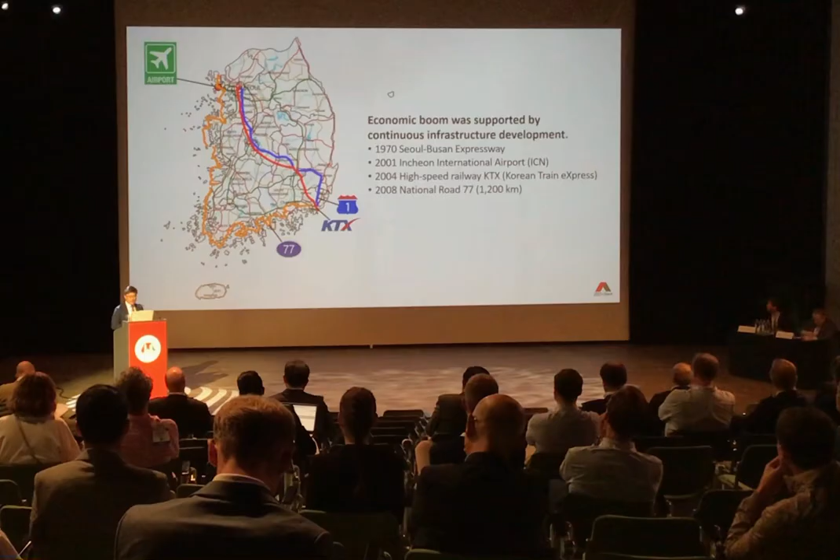The economic boom was supported by continuous infrastructure development: the Seoul-Busan Expressway in 1970, Incheon International Airport in 2001, Korea's high-speed railway in 2004, and National Road 77 stretching 1,200 kilometers along the west coast, to be completed in 2008.

Our research began in the mid-1980s with the development of analysis programs covering elastic catenary cable elements, initial configuration and equilibrium analysis, and construction stage analysis.

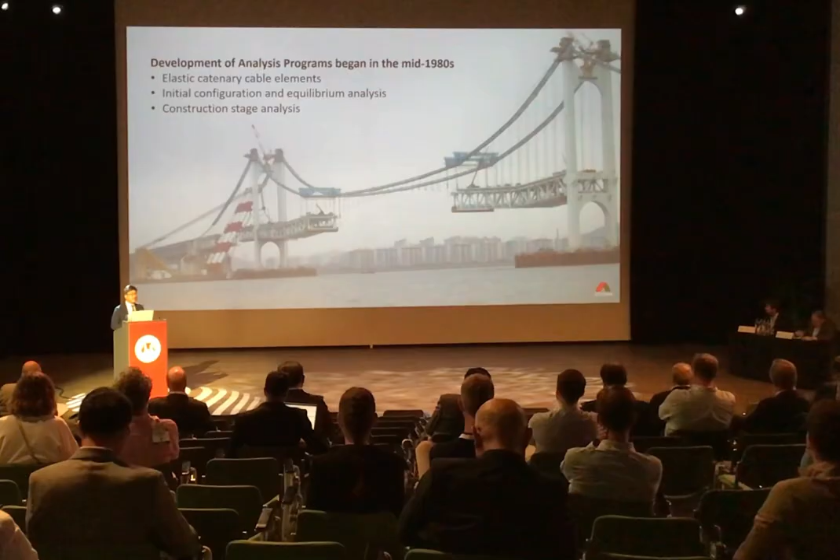These analysis programs were later applied to the Youngjong Bridge, a self-anchored suspension bridge with a three-dimensional main cable. Unlike earth-anchored types, the self-anchored system required a very different construction process, demanding more precise cable analysis.

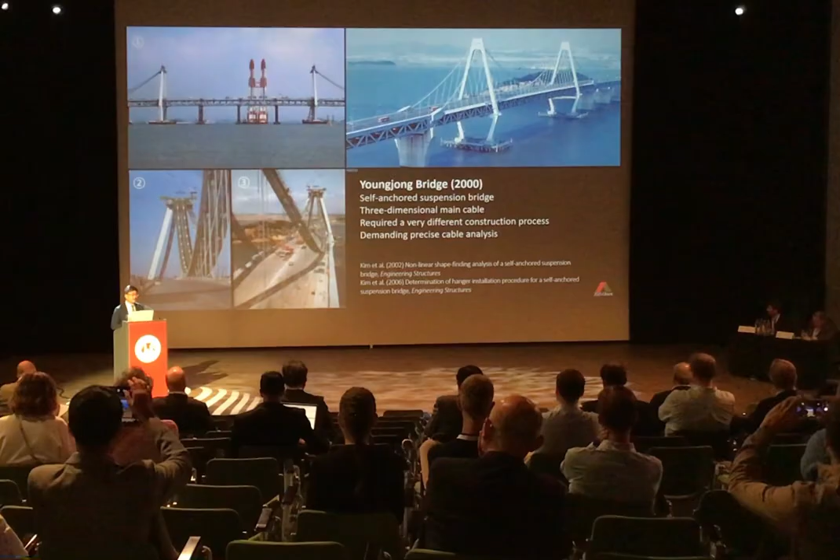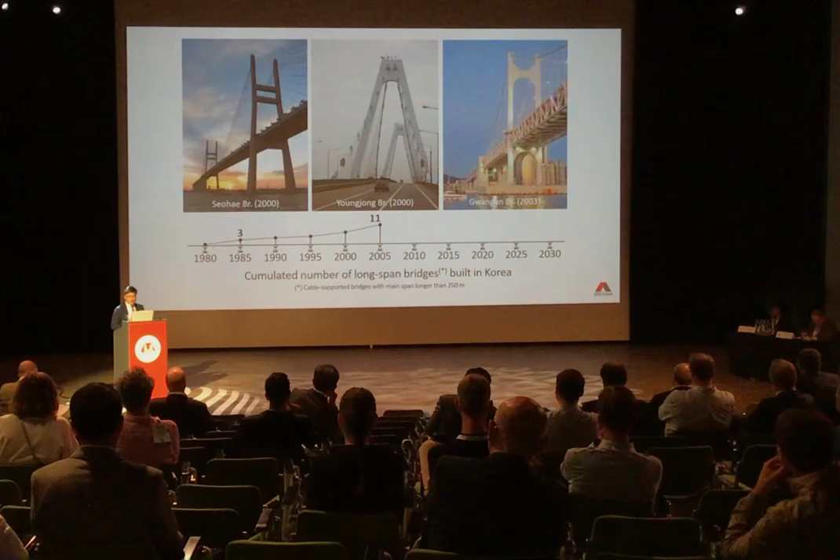We had merely 3 long-span bridges before 1985. The entrance into the 21st century was a turning point in Korean bridge technology. Seohae Bridge and Youngjong Bridge were completed in 2000, and Gwangan Bridge opened to traffic in 2003.

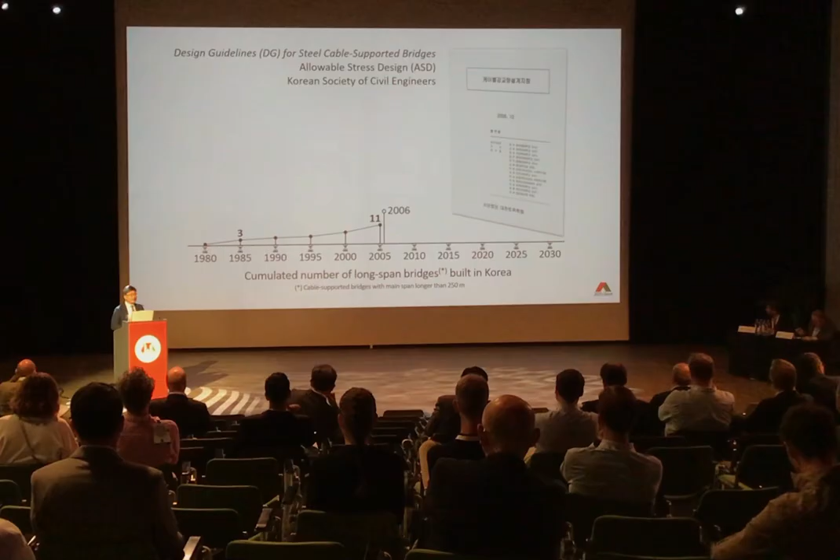In 2006, we developed the design guidelines for steel cable-supported bridges, relying on allowable stress design under the auspices of the Korean Society of Civil Engineers. In the same year, these design guidelines were adopted for the design of the Yi Sun-sin Bridge.

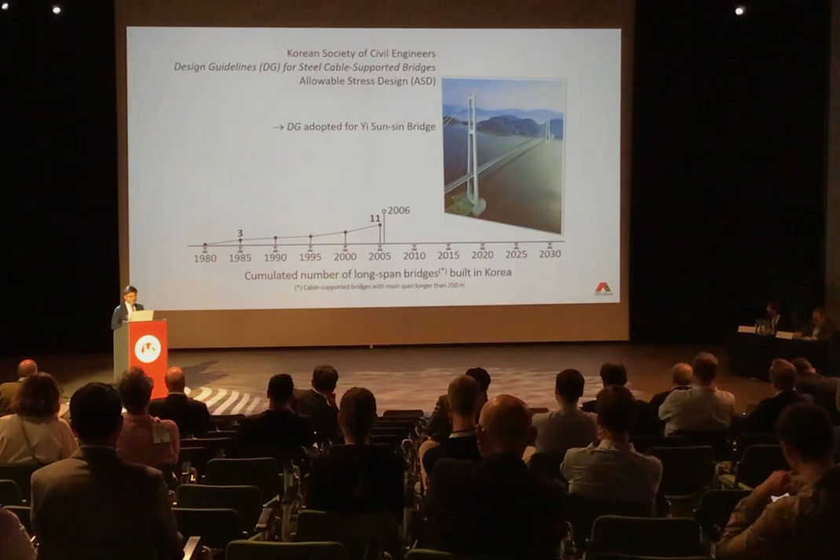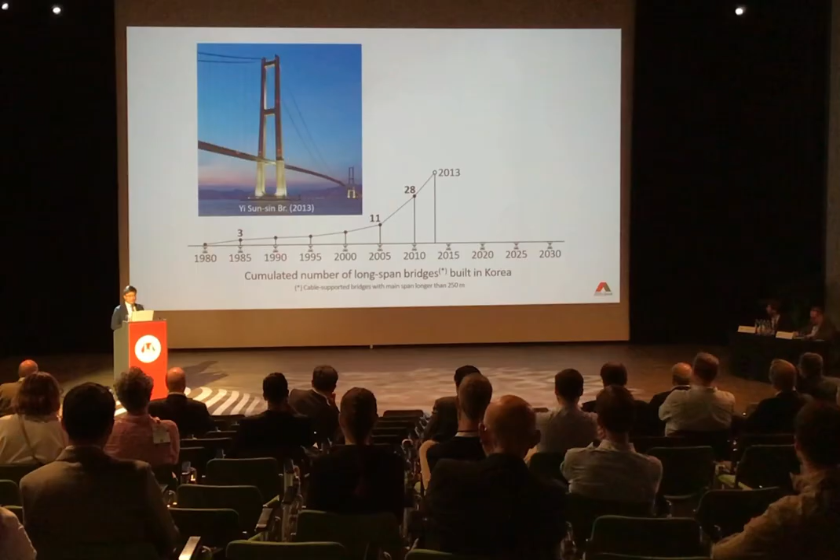The Yi Sun-sin Bridge was completed in 2013, and there was a sharp increase in the number of long-span bridges. The Yi Sun-sin Bridge is the longest, with a main span of over 1.5 kilometers. The gap between the twin decks was reduced to 4.3 meters through intensive wind tunnel testing.

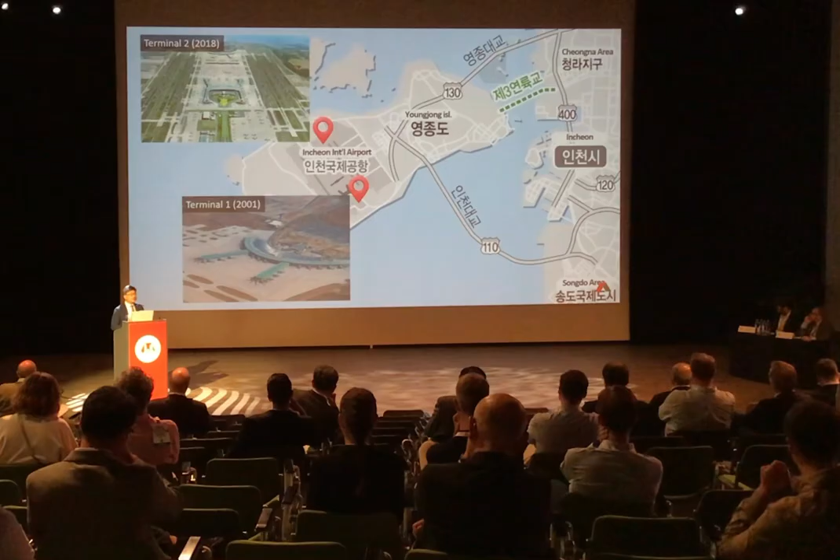At the dawn of the new millennium, Incheon International Airport opened with Terminal 1 in 2001 and expanded to Terminal 2 in 2018. Sea crossing bridges were built as the airport grew, and the third connecting bridge is currently under construction and will be completed next year.

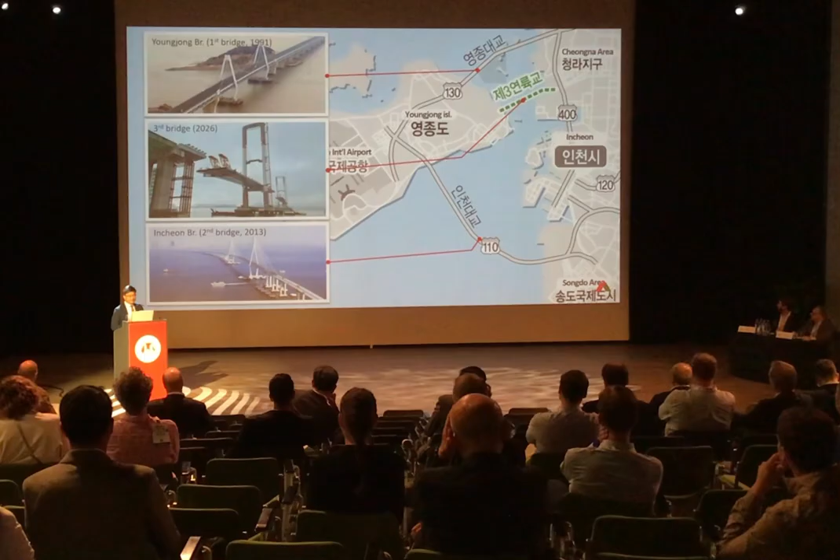The number of passengers has increased steadily, reaching 80 million today. This demonstrates the important role of infrastructure in promoting social development and enhancing international connectivity.

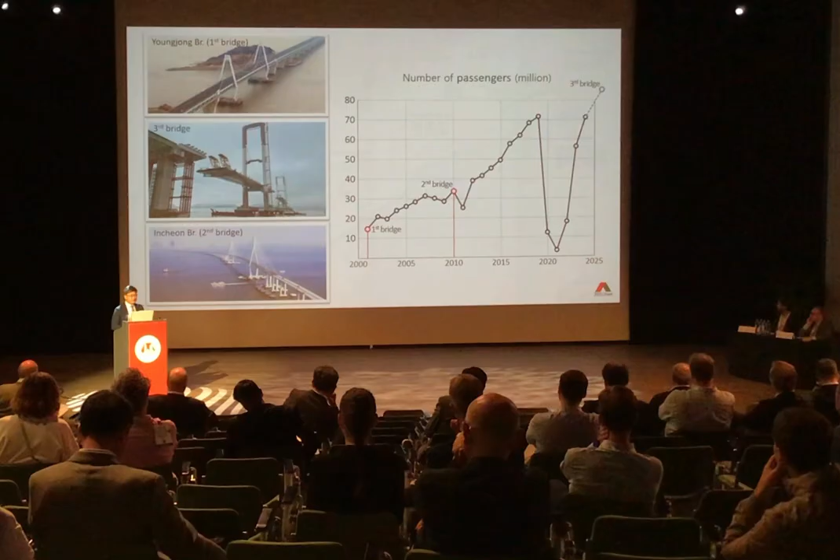During this period, we were planning the Value Creator 10 R&D project under the Ministry of Construction and Transportation, with the Super Long-Span Bridge project as one of its flagship initiatives.

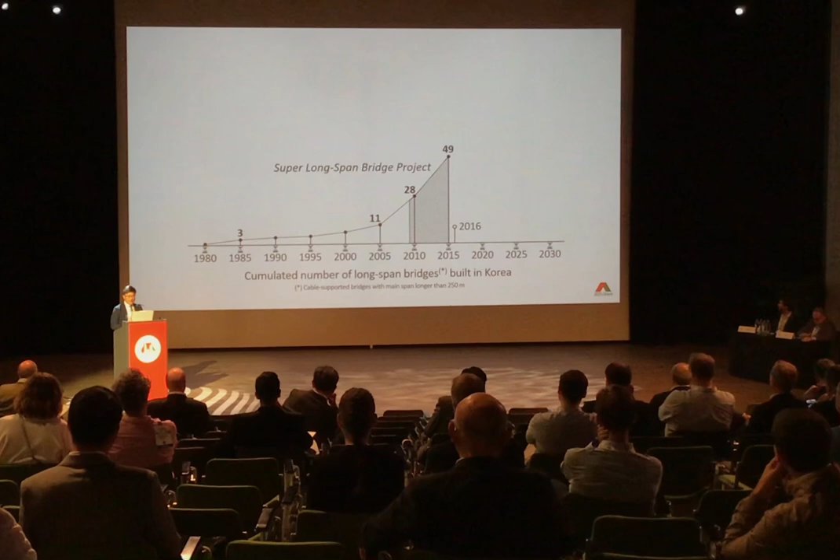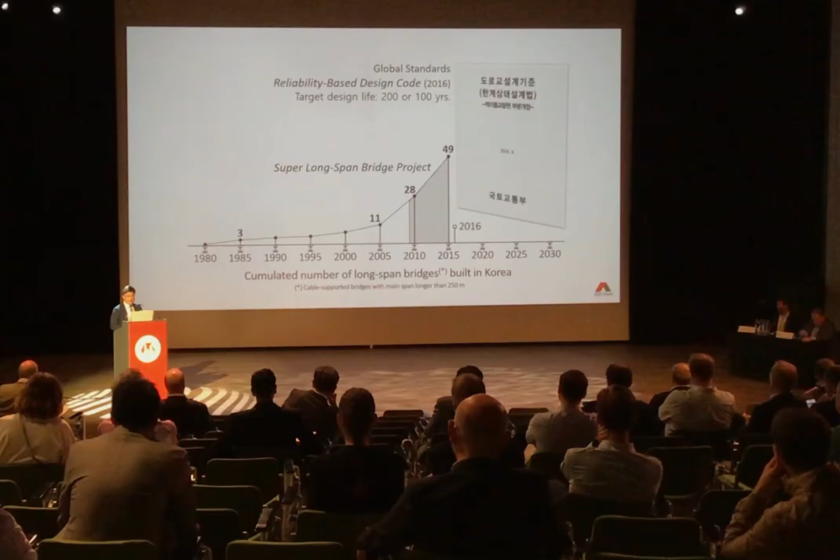As an outcome of the Super Long-Span Bridge project, we developed a reliability-based design code targeting a 200-year design life. The target reliability was set at 3.7 to 4 for traffic live loads, to unify load combinations and load factors across long and medium span bridges.

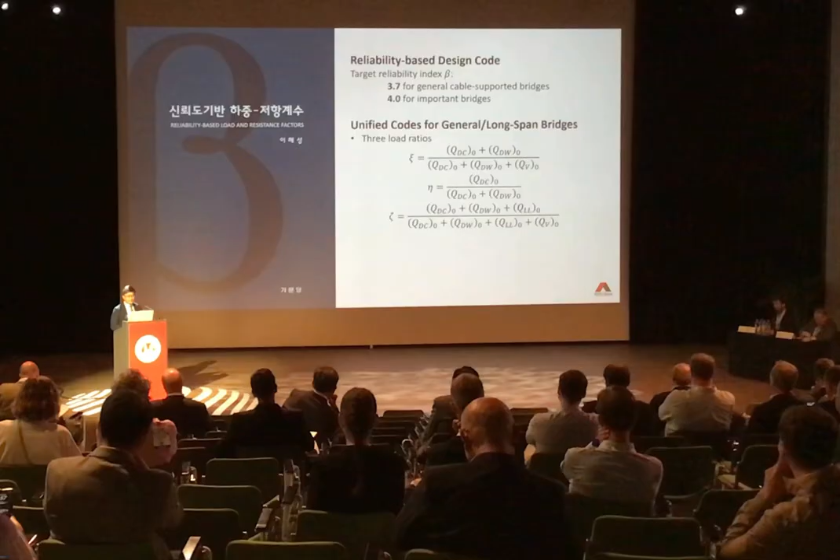We introduced 3 non-dimensional load ratios. We adopt lower beta values for lateral loads such as wind and earthquake, to account for higher variability when dead load contribution is minimum. For code calibration, we introduced the concept of RRD, the ratio of return period to design life. RRD was set to 12 for wind, giving a target reliability index of 2.0, and 24 for earthquake, resulting in a target index of 1.5.

Jeollanam-do is the southernmost province in mainland Korea and comprises 1,891 islands, of which 400 are inhabited. Jeollanam-do has developed a diamond-shaped network linking its major islands, with the longest connection being the 8-kilometer Cheonsa Bridge.

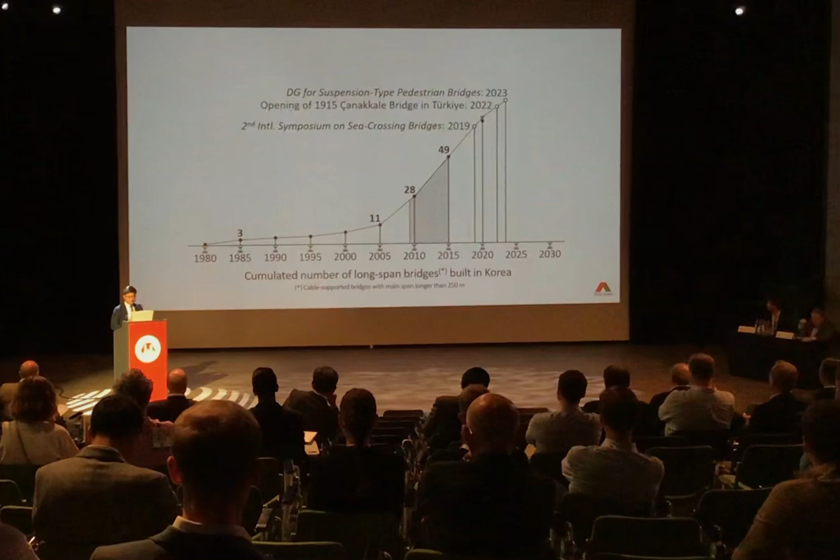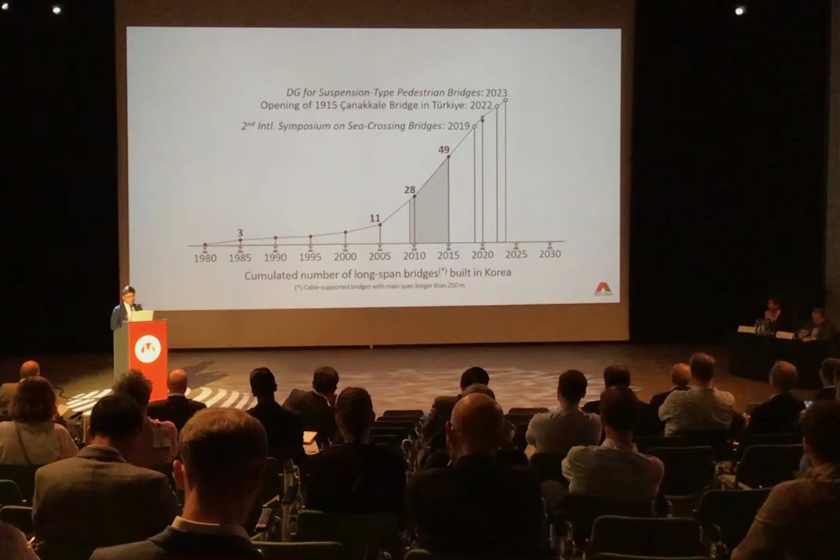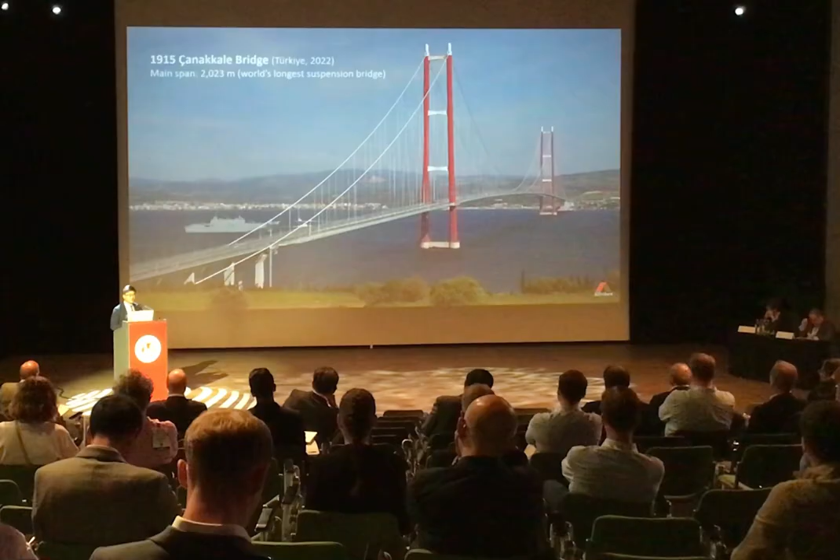The world's longest Çanakkale Bridge opened to traffic in 2022. Two Korean companies, DL E&C and SK, built the bridge with two Turkish partners and are now operating it.

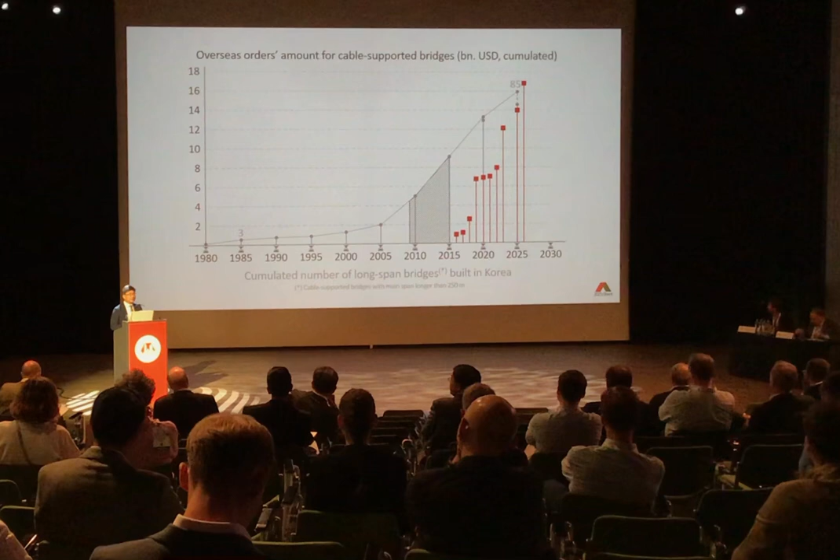High-strength wires for suspension bridge main cables were developed by POSCO and Kiswire. In the 1990s, 1.5 to 1.7 gigapascal was used. From the Yi Sun-sin Bridge, we applied 1.86 gigapascal, then 1.96 gigapascal for the Ulsan Harbor Bridge. These wires were also supplied to the Çanakkale Bridge. And we are now applying 2.16 gigapascal for an ongoing project.

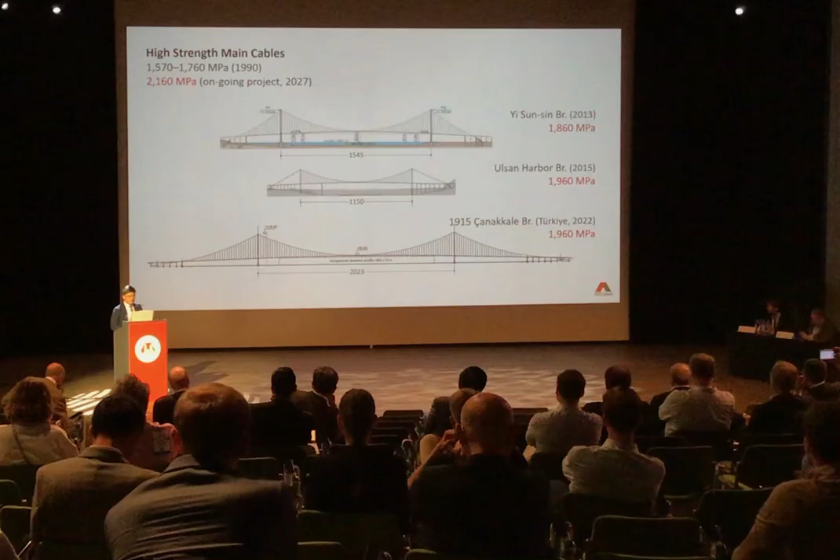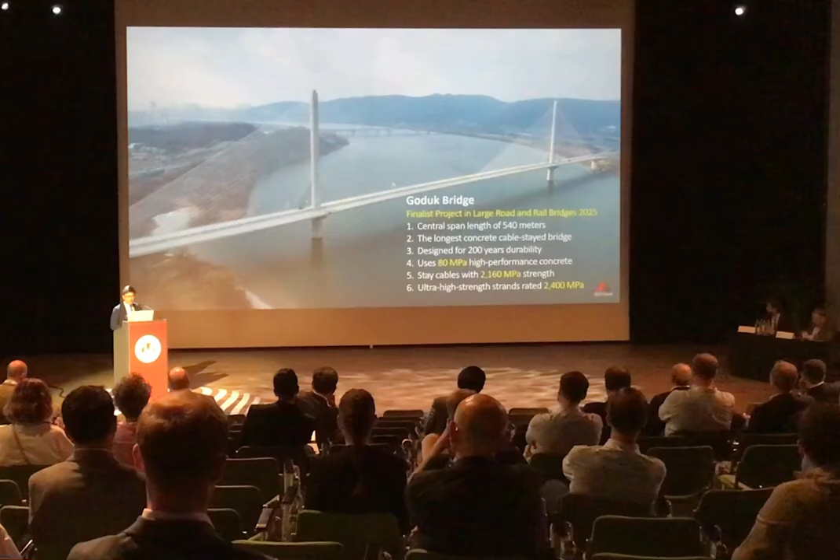Very recently, a concrete cable-stayed bridge with a 540-meter main span was opened over the Han River in Seoul, using 80 megapascal high-performance concrete. It was honored as a finalist for this year's IFC Award in the large road and rail bridges category.

UHPC was also developed by the Korea Institute of Construction Technology under the Super Bridge 200 project, targeting a compressive strength of 180 megapascal, and it was later applied to the Chuncheon Bridge.

Let me now share some case studies on long-span bridges I have worked on, focusing on aerodynamic issues in wind engineering.

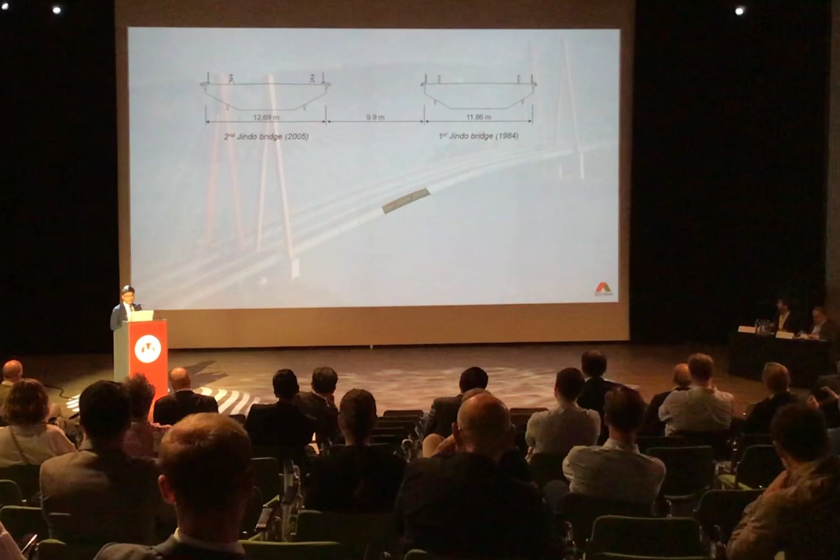This is the Jindo Bridge. The first bridge, one of the first generation bridges, was built in 1984. Twenty years later, a second bridge was constructed as a twin bridge to accommodate increased traffic volume. The gap between the two decks is around 10 meters, and both use guide vanes to mitigate vortex-induced vibration, which works well for the first bridge.

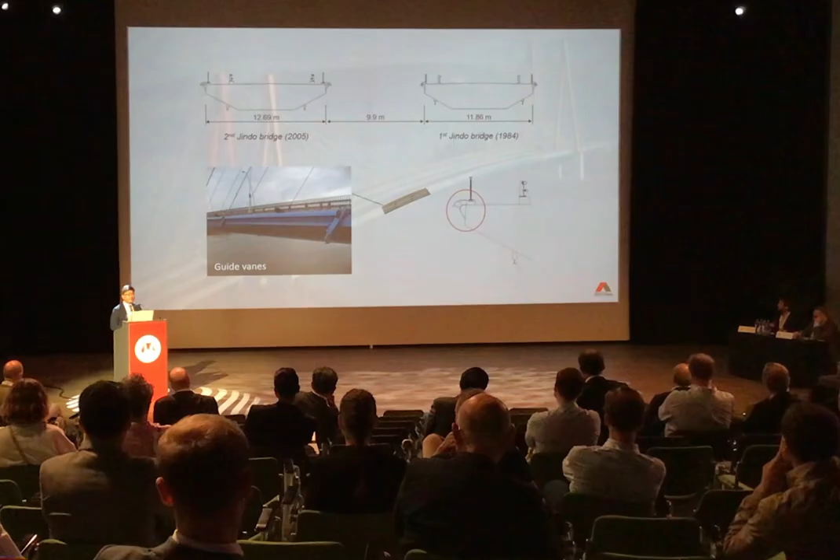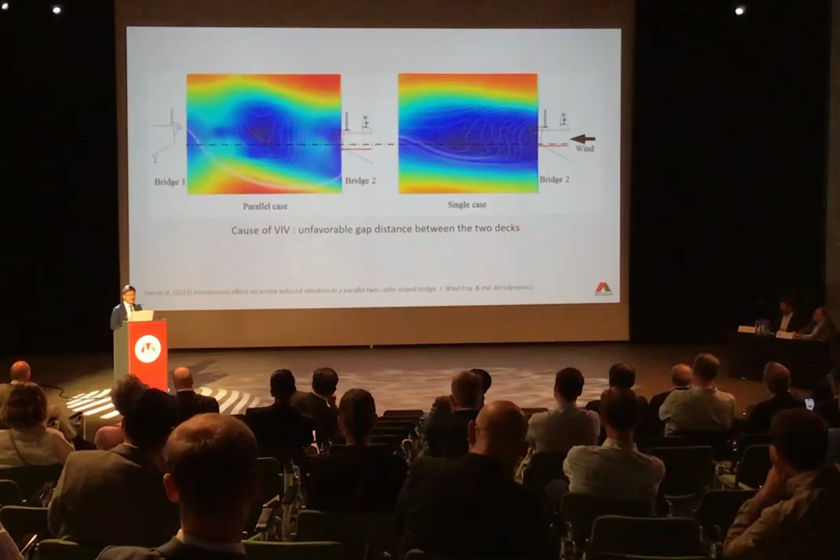To clarify the interaction between the two decks, a PIV test was performed. The right image shows wind flow for the single deck case, with dark blue indicating near zero wind speed. The left image shows flow between two decks, where sky blue streams highlight amplified vortex trails behind the upstream deck, inducing its vortex-induced vibration. Changing the distance between the decks weakens this vibration, showing that the 10-meter spacing happened to be the most unfavorable choice.

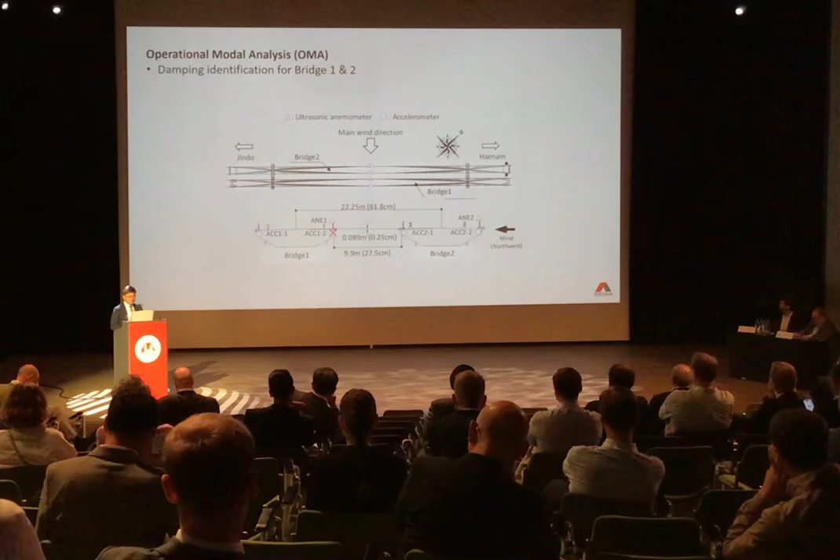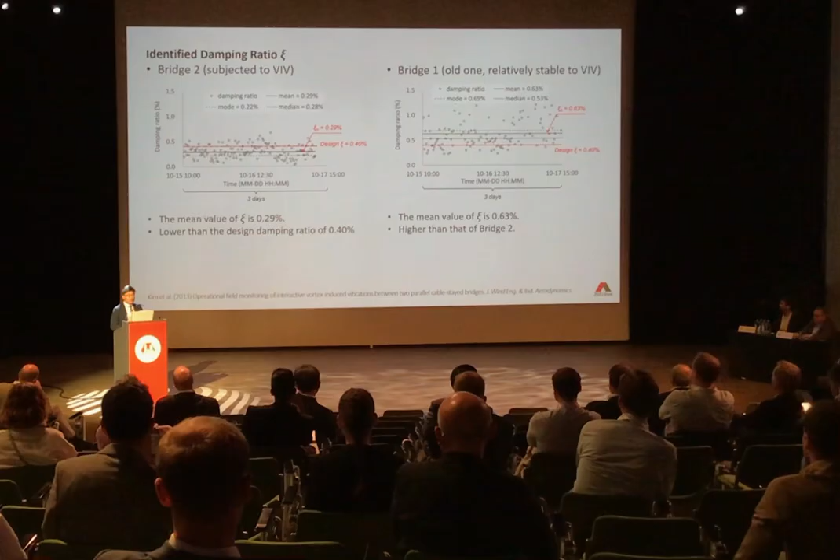We also performed operational modal analysis to determine the damping ratios of both bridges using data from built-in sensors. On the left, each circle represents the estimated damping ratio for 20 minutes of data. The average damping ratio of the new bridge was 0.29%, much lower than the design value of 0.4%. In contrast, the old bridge shows a damping ratio of 0.63%, higher than that of the new bridge.

In conclusion, the cause of vortex-induced vibration can be summarized as, first, unfavorable deck spacing, and second, unexpectedly low structural damping of the new bridge. This is a particular concern for recent bridges that use high-strength steel and simplify welded details.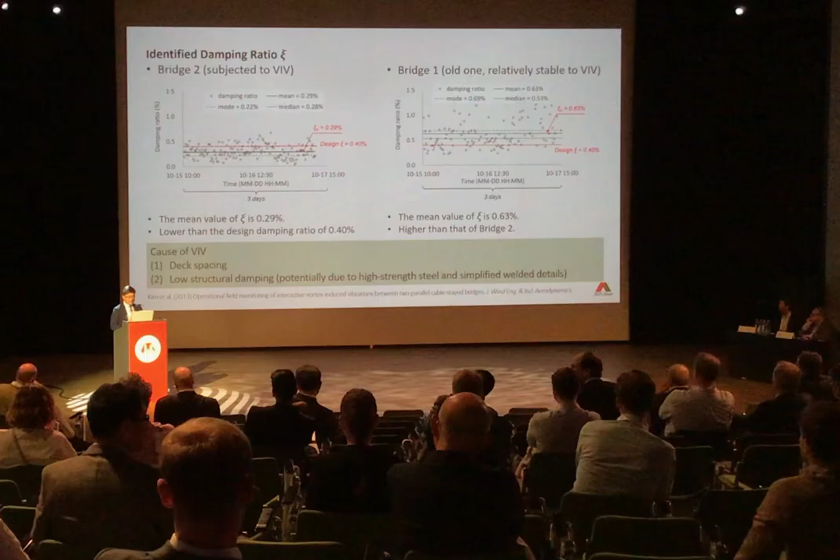Next is Cheonsa Bridge. Personally, it is my favorite as its bundled stay cables create a harmonious aesthetic. The bridge has high and low pylons with concrete decks on the approaching span and a steel deck in the central main span.

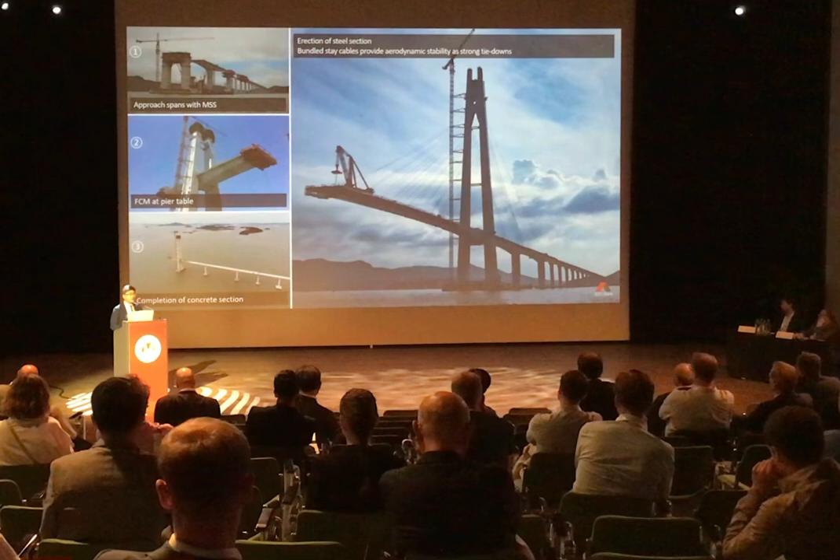A moving scaffolding system was used for the approach spans, as shown in Figure 1, and the free cantilever method was applied at the pier table of pylons, as shown in the second figure. The third figure shows the completed concrete deck spans. Afterwards, the steel deck of the main span was constructed with strong tie-downs provided by the bundled cables for aerodynamic stability during construction.

Although the bridge was well designed, vortex-induced vibration was reported soon after its opening.

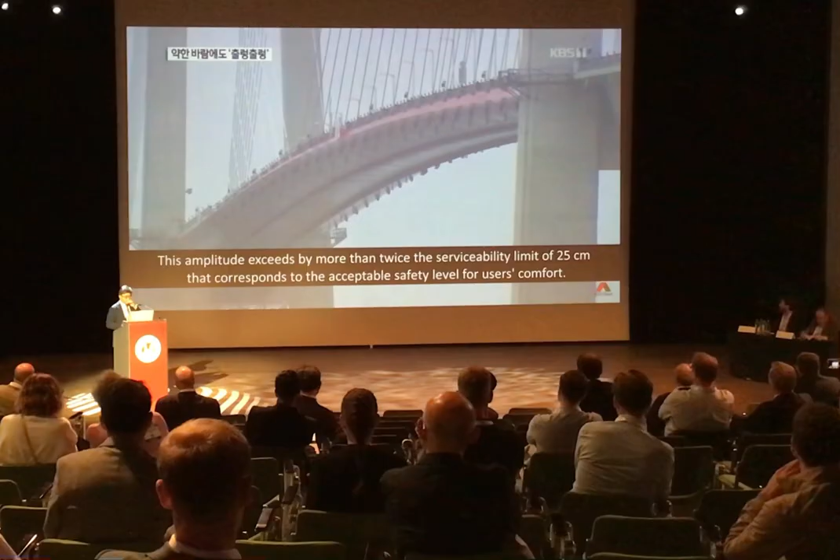So it is a news broadcast at the time, and this vortex-induced vibration was caused by the incorrect positioning of maintenance rails beneath the deck.

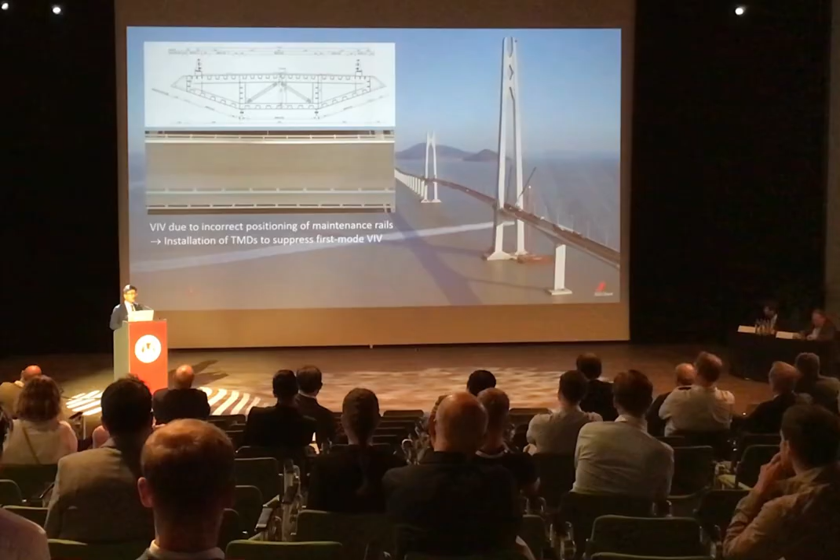The bridge owner installed tuned mass dampers to suppress this vibration. The deck's vortex-induced vibration was effectively suppressed by the tuned mass dampers, but additional issues arose with stay cable vibration.

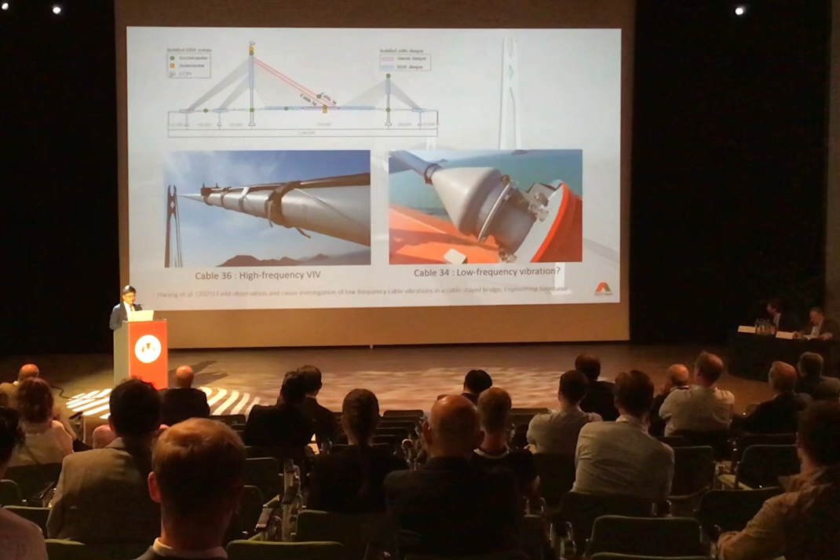So this is low-frequency vibration for specifically cable 34. We investigated the cause of this low-frequency vibration using CCTV images provided by the bridge owner, recorded during the vibration of cable 34.

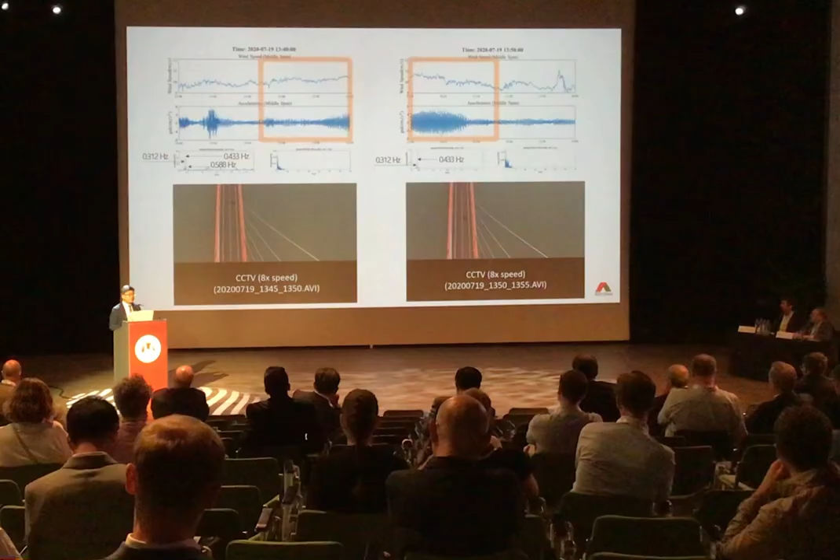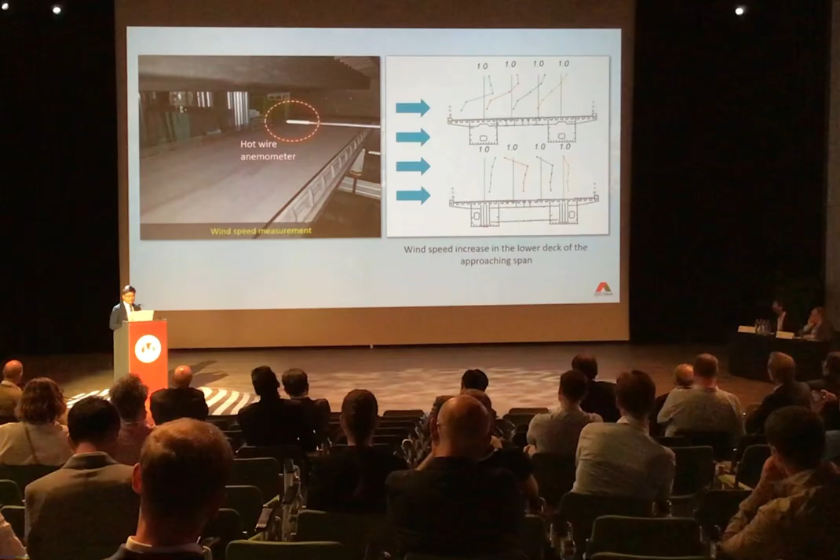We performed wind tunnel tests and found an increase in wind speed over the lower deck. We conducted wind tunnel tests to measure aerodynamic forces on a vehicle using load cells in a truck model. Since the vehicle moves along the bridge, the wind incident angle constantly changes, so we implemented a system to account for this variation.

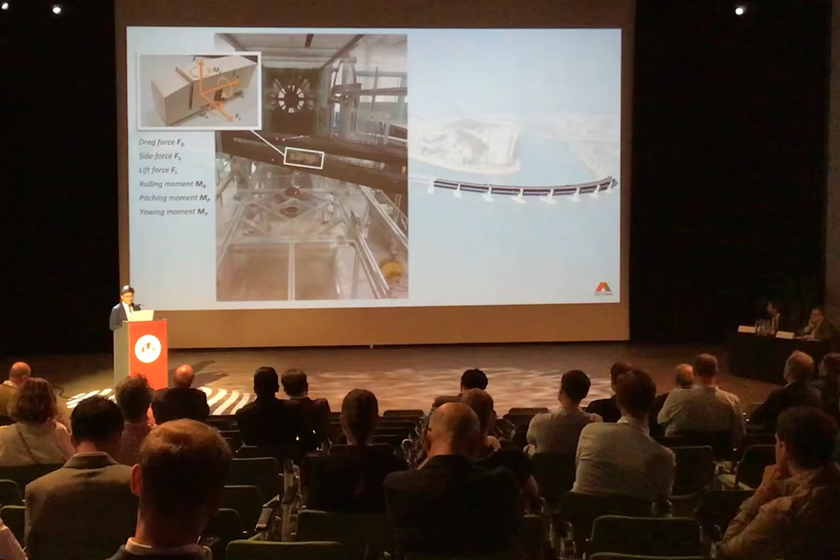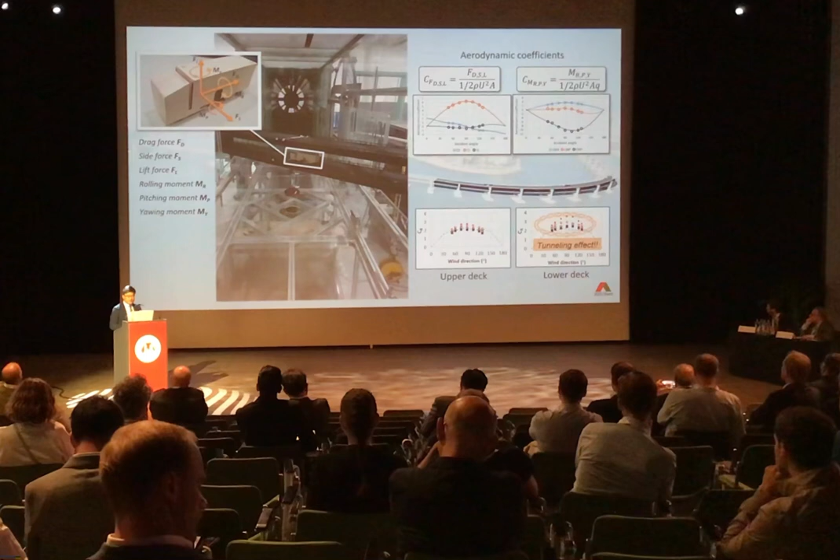This allowed us to determine aerodynamic coefficients in terms of the incident angle, and quantify the increased wind load on the low deck. This is known as the tunneling effect.

In this figure, the critical wind speed curve, we can find out the most vulnerable wind direction is south, with critical wind speed around 15 to 20 meters per second. If we combine long-term wind and rainfall data, we can evaluate the risk index in terms of accident frequency.

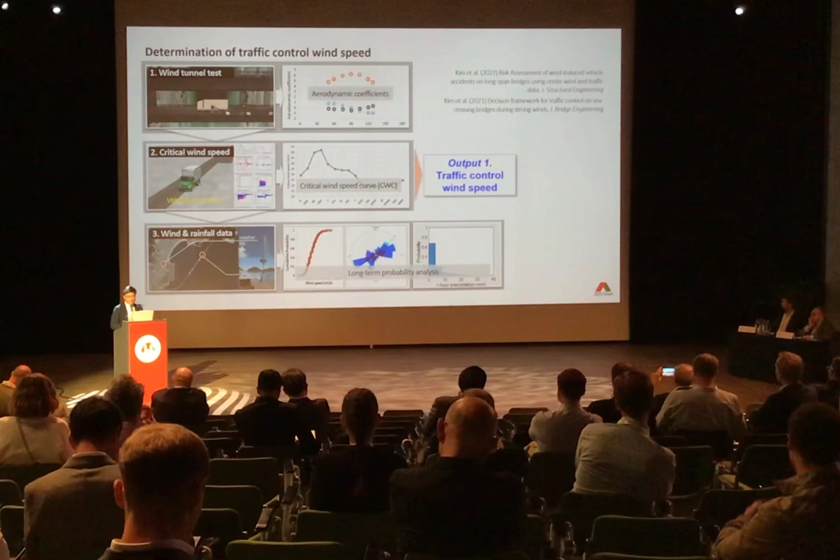Under the regular driving speed of 80 km per hour, we identified 3 hotspots. We also examined 3 types of vehicles. The truck was the most vulnerable, especially on the low deck approach spans, where traffic accidents were observed. The critical wind speed was relatively low, around 15 meters per second, in terms of 10-minute average wind speed.

By reducing the vehicle speed to 40 km per hour, the critical wind speed increased by 2 to 3 meters per second, reaching about 17 meters per second on the low deck for the truck.

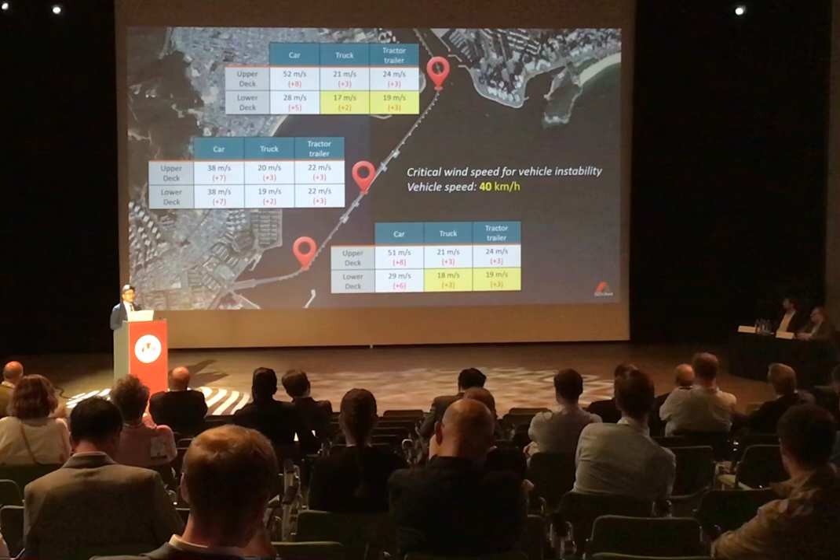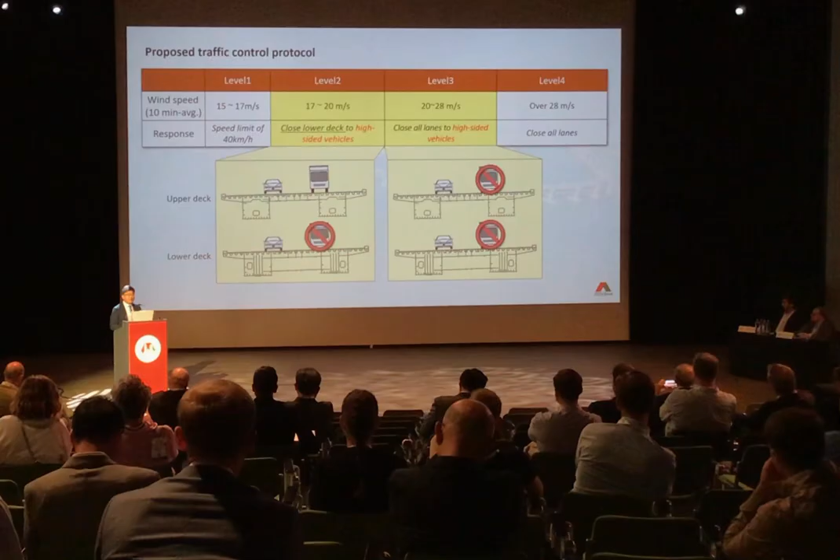Based on this, we propose the following traffic control protocol. When wind speed approaches 15 meters per second, the speed limit is reduced to 40 km per hour. At 17 meters per second, the lower deck is closed to high-sided vehicles. At 20 meters per second, all lanes are closed to high-sided vehicles. The bridge owner accepted and simplified this protocol for implementation.

I would like to conclude my presentation with a vision for long-span bridge technology. For the midterm to 2035, focus should be on high-performance materials, a shift in design paradigm, diversification of crossing methods, and AI-based operations such as Bridge2X. For the long term, up to 2050, key issues will include intercontinental links, carbon neutrality, and automation.

We need to consider new bridge types such as Hyperloop and submerged bridges. New materials and morphological optimization will continue to be developed to reduce carbon footprint, and multifunctionality will be increasingly required as bridge functions expand.

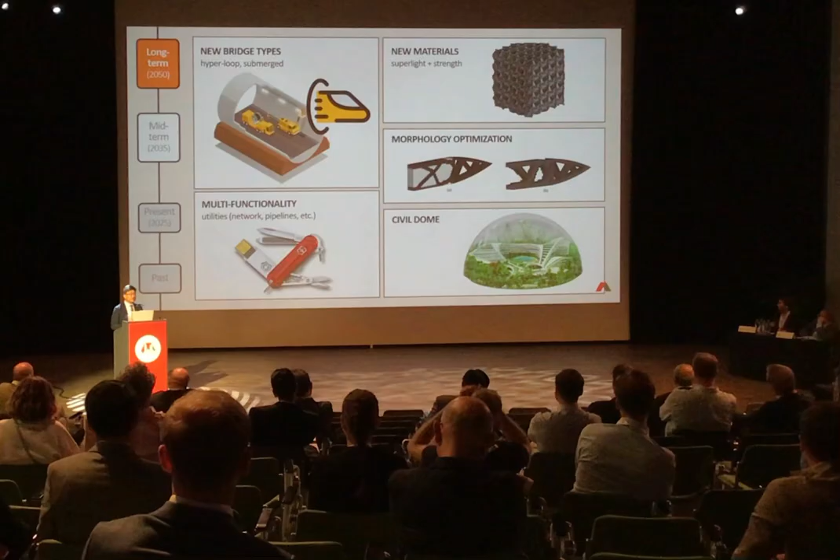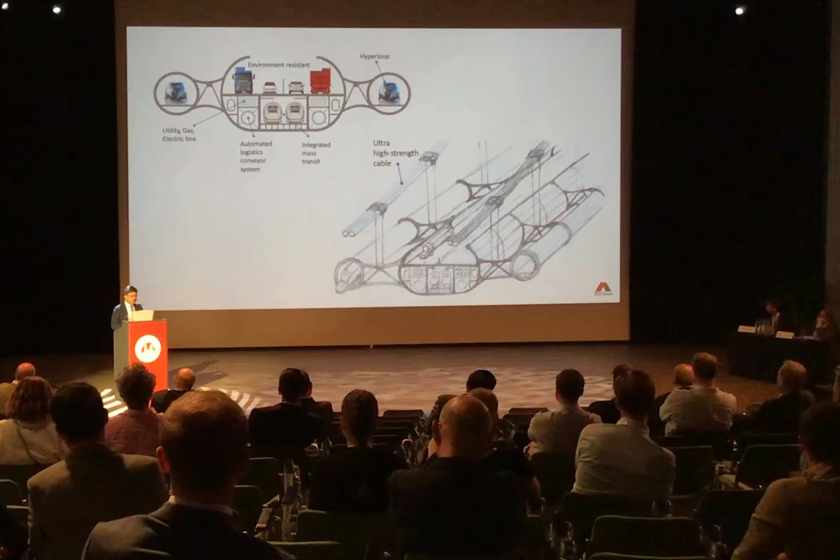This is a sketch of multifunctional bridges developed in discussion with engineers. You can find integrated mass transit, automated logistics conveyor systems, utility gas, electric lines, and even Hyperloop.

Until now, we have focused on expanding the span length of bridges, but I would like to propose more flexible bridge types that can accommodate large displacements and deformation while maintaining serviceability both above water and below the sea.

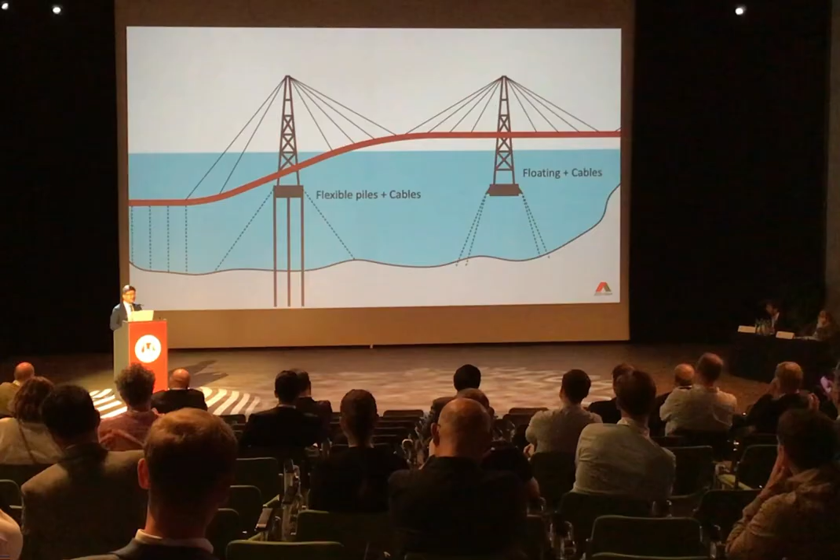A few years ago, we launched the Floating Infrastructure Research Center, FLORA, focusing on expandable modular floating platforms and floating bridges. These are our FLORA members, and we will begin constructing a test bed in this harbor next year.

Thank you for your attention.